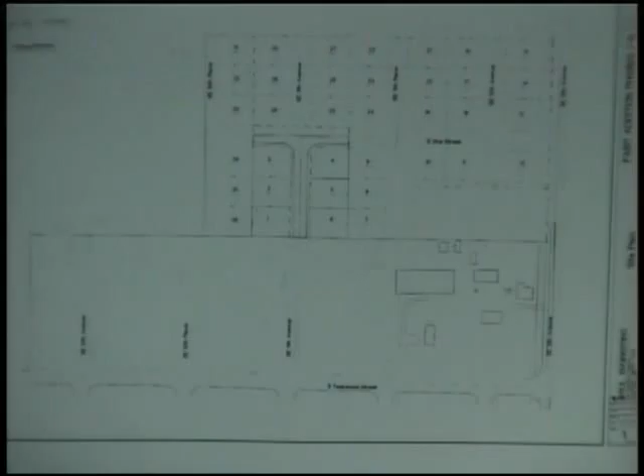What we're doing here with the initial phase is these 6 lots right here, which has an extension of this public street coming to serve those 6 lots. They're also platting this portion of a new street called South Vine Street that will eventually go through the remainder of the 2nd and 3rd phase and connect with Southeast 13th Avenue.

This shows the same thing turned on its side now, so you see the site here. It's vacant, pretty much fields, no houses on it. Here's that street, Southeast 11th Avenue, being extended in to serve the initial phase that's in this area here. And one more view showing you the initial phase, the 6 lots here, and the portion of Vine Street that would be final platted along with that.

The reason for its phasing is primarily that this initial phase is able to very easily be served by all necessary public utilities and streets by just an extension, basically eastward from the previous subdivision that's been developed to the west. As you move into the second phase, this is showing the second phase in green.

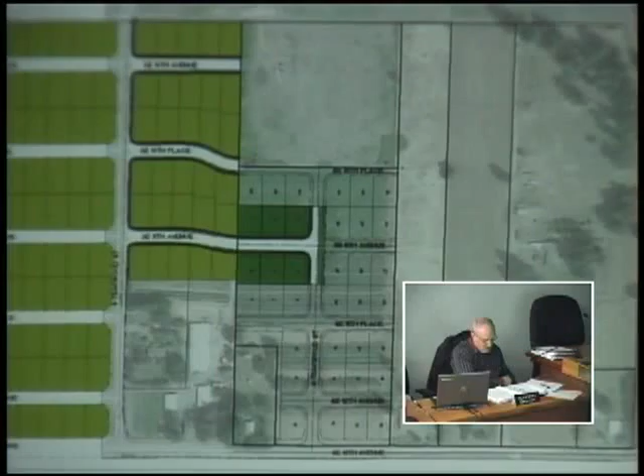And then on the next page, on condition number 24, the second sentence mentions a subdivision final plat for Phase 1, and it's more correct to say for the initial or first phase, rather than Phase 1 - it should be prepared in substantial conformance with the approved tentative plat. We have the same issue in condition number 28, where it should say the first phase rather than Phase 1. It becomes a little confusing with the current wording there.

I think that's the only corrections I wanted to point out. Other than that, staff's review of the facts and findings submitted with the application indicates that it meets the approval criteria, and we recommend that subdivision 1601 be approved subject to the conditions of approval listed in the staff report.

Thank you, Brian. Any questions for staff?

Okay, so let's move right along to the proponents. And turning on the bright lights so that rods and cones are flashing.

Good evening. I'm Pat Sisul with Sisul Engineering, 375 Portland Avenue, Gladstone. I'm here with the applicant, Ralph Netter, tonight. When I'm done, if you have any questions you'd like to ask him, he'll be happy to come up, but unless you have specific questions for him, I'll probably be the only one that speaks tonight.

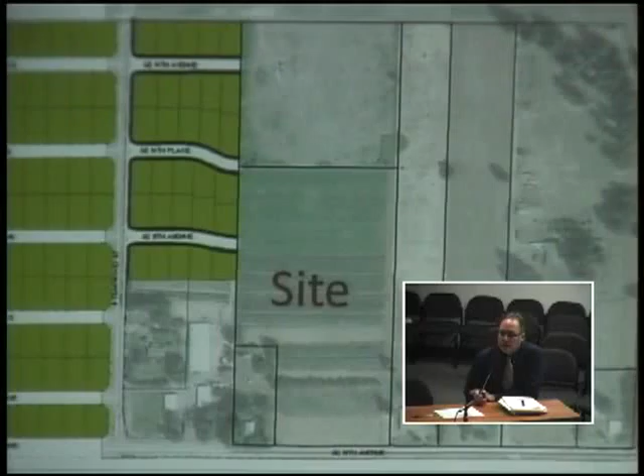This whole area - this lot here in the corner, then these two long skinny ones, and then this large piece here - made up the 5 parcels that were annexed into the city recently. Those 5 parcels and this one on the corner were part of the development concept plan that the city approved, but this owner chose not to be annexed, not to be included in the annexation.

So all of these properties are now in the city with the exception of this one on the corner, but there has been a development concept plan that planned for it to be developed, how it would be served by roads and sewer at the time it does come in.

So phase 1 of the subdivision will be 6 lots. It'll be the continuation of 11th Avenue. All the utilities to serve these 6 lots are available right here. And the reason we're going with these 6 lots is because gravity sewer is available in this direction.

There is sewer in Teakwood. It comes down to 13th, and it comes east as far as this line, and it's actually about 11 feet deep right at that line, but the ground falls off so quickly that by the time we brought the sewer up here and in, it would only be about 3 feet deep at this first intersection.

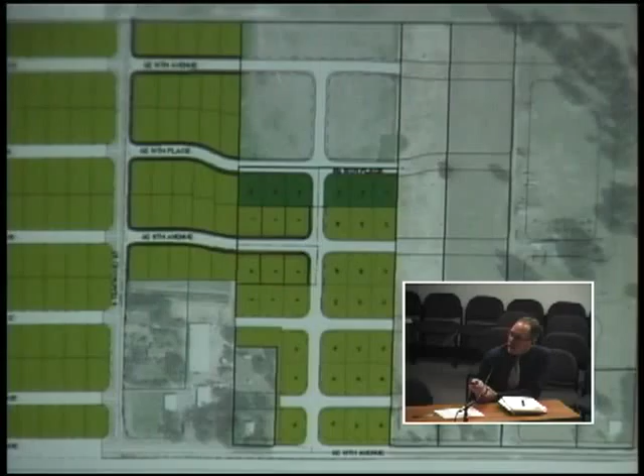Vine Street would continue north, intersect with 10th Avenue, and 10th Avenue would continue east. Taking that out further, this is the rest of how the streets were planned in this development concept plan area. All these streets would continue east and connect with a new north-south street, which I believe we call Walnut, and then loop through here to Willow Street. You can see how access was made to this parcel in the corner.

This area up here where the trees are, there's approximately a 1 acre park proposed on the Stoller property in that corner, and that's why there's no park dedication in this subdivision. This subdivision will just pay park SDCs. There's a little park area right here that nothing's ever really been developed on, and there's this park area here that's planned. Then you've got the school property up here, which a lot of people use as park, and the bike trail all along the east side of the development concept plan area.

There's two options for the sanitary sewer. There's a dry sanitary sewer line right here in Sequoia Parkway, and two ways to get there. One is to secure easements from the neighbors to bring a sewer line through an easement down following the future street pattern and connect. There's one stub located right here and a second stub located right here that were provided in developing. Depending on timing of everything, that's one option. To go that route we'd need easements from the three property owners. The other option, a little tougher to see because of the writing, would be to bring the sewer out to 13th Avenue and down 13th Avenue to connect to the city-installed sewer at that point.

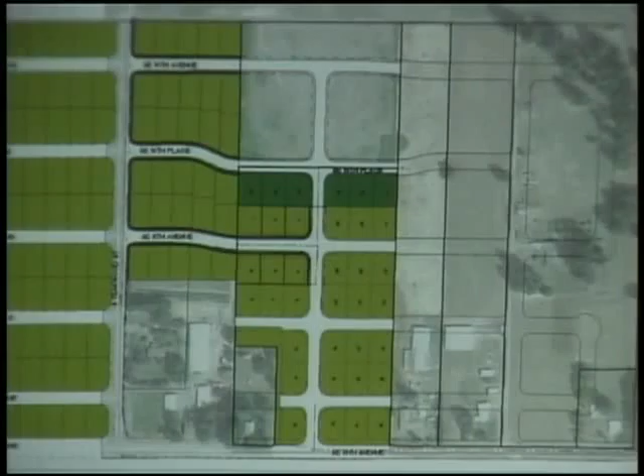Questions about that? I was just wondering, because I counted 4 right angles on the first drawing you had there, is that correct? Yeah, 1, 2, 3, 4. So it would seem to me to be less expensive - I'm not a big fan of right angles when it comes to sewer stuff, but I'd think just coming straight down would be less costly. Through 13th Avenue? Yeah, which is the second option, right? Yes.

What is the preferred option? I would say this would be the preferred option because it could be done without any impact to 13th Avenue. To put the sewer line down 13th Avenue would mean construction traffic out in the middle of 13th Avenue, disrupting traffic, more expensive backfill, and pavement repair. It may be the only option though - it is an option because it's public right-of-way. But if this option is available...

If all these properties were being developed at one time today, these lots along here would drain to a sewer line in this street. There'd be a row of lots on this side of the street and a row of lots on this side, draining to a public main here, as would all these others. There wouldn't be a need for a sewer main in 13th in a perfect world, because these lots would drain this direction - that would be south, right? Is that correct? And then you're going to turn around and pump it back up in the other direction, north? Yes.

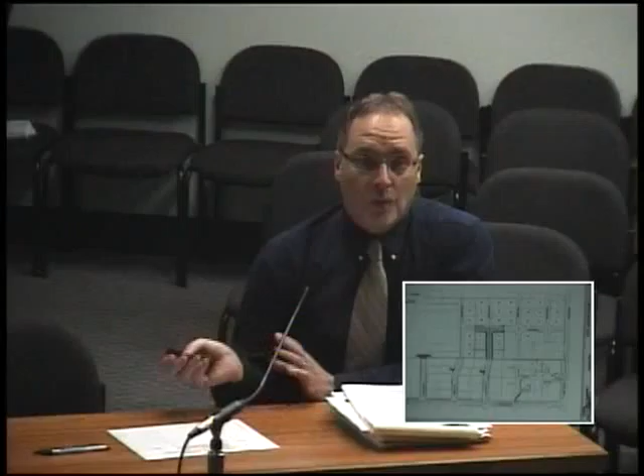We've shadow platted the area. You can see how we anticipate that with future development of tax lot 800, there could be room for an additional 6 lots to be developed in this area.

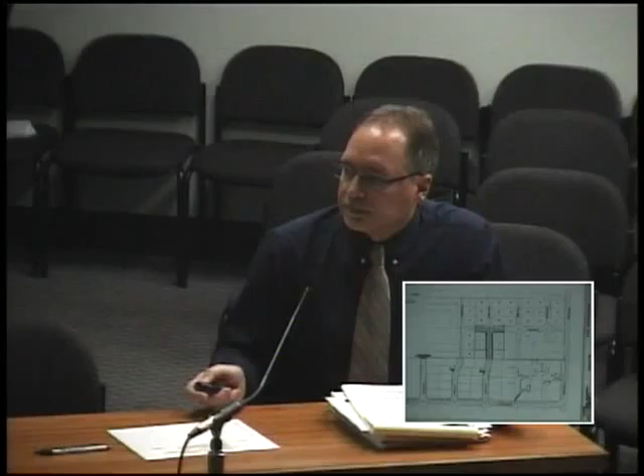There's a little leftover piece of our subdivision that we're planning on. That leftover piece could be combined with tax lot 800, and there'd be room for a total of 6 lots in that area. We've shown how, if the school property, currently R1 zoned for residential development, we've planned it out with how lots could be laid out in that subdivision.

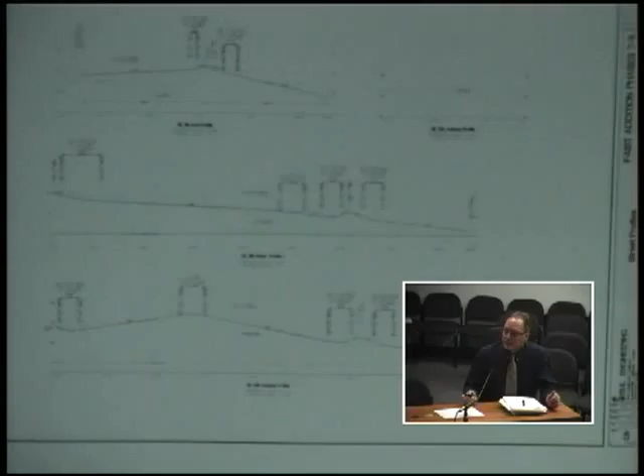These lots, Feist Addition Phase 6, this was recently just platted. I don't expect you'd see anything happen with the Feist parcels for quite some time, but in time these roads will connect through.

With this phase, we've master planned street profiles for all the new streets through this area, shown the city how all the streets would be laid out. Apologize, it didn't come through too clearly.

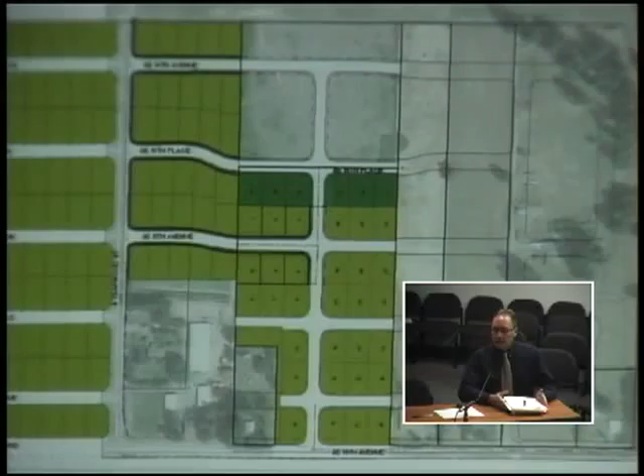I think, as Brian mentioned, the issues have really been worked through the development concept plan. That's why we went through that big process during annexation, to lay all this out and try to hammer out all these issues before annexation occurred, which we did. This plan is just now us coming before you trying to be consistent with what you've already seen and what you and the city council have already approved.

Okay, thank you. Any questions for me? Okay, thank you.

Any other proponents? Mr. Netter, I want to congratulate you on keeping your sons gainfully employed. It's a goal for all of us with children.

So, any other proponents, any opponents, any neutral parties? Okay, that's it. Then I will close the public hearing.

So we will have any more questions from this body, if you have any questions of staff or the applicant? Not.

Why are you looking at me? I just explained to you. Have I just... Post-it notes. Yeah, you have post-it notes, yeah, there you go.